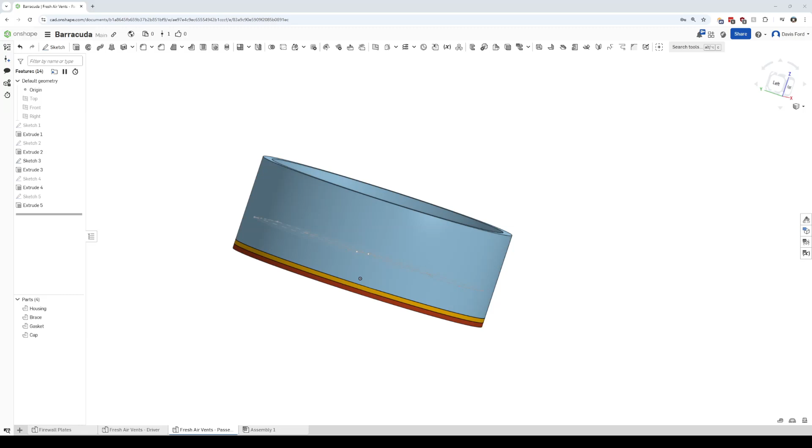This all started because my wife would complain about being really cold in my 1968 Plymouth Barracuda when I would take her on a drive, and rightfully so. There's this giant gaping hole that brings in fresh air from the cowl and deposits it in your passenger's lap. It's great in the summer, it's horrible in winter. On the driver's side, there's a box that controls this, but on the passenger side in an AC delete car, you don't have that luxury.

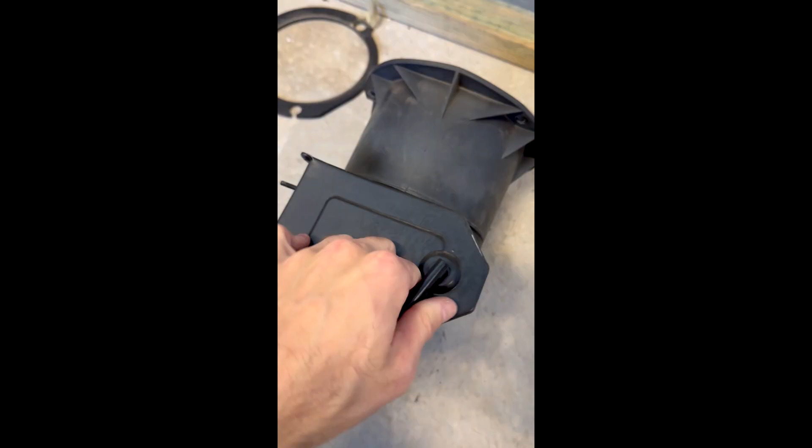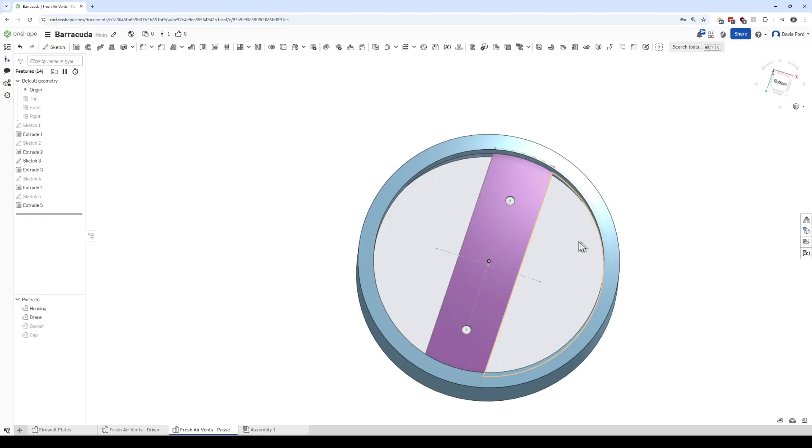So I whipped up a design in Onshape and sent it off to SendCutSend, who cut it out of stainless steel, tapped some threads, and sent it back to me. This is the fresh air vent in the Barracuda. You can't really tell from the bottom, but if you flip it over, you can see that there's a 4 millimeter deep lip inside that cylinder. So to take advantage of that lip, I designed this rectangular brace with rounded ends. It has two holes that we can thread bolts through in the future.

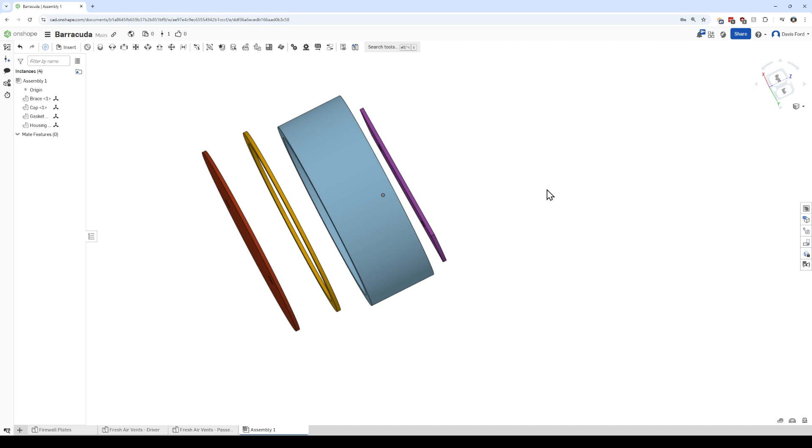So the way we're going to keep air out is by putting a cap on this thing. This cap is made out of 2 millimeter thick stainless steel. It's also got a couple holes in it, which, surprise, surprise, are going to line up with those holes on the brace. So here's how it all goes together. The yellow thing in the middle is a rubber cork gasket. It's pretty thin. It's just there to seal up any imperfections in the Barracuda's body metal.

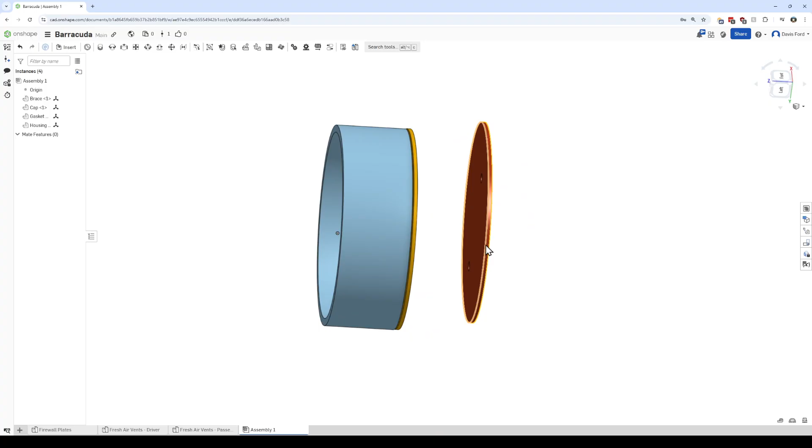But as you can see, we're just going to drop that brace down into the cylinder. It's going to rest on the lip. We're going to put the gasket and the cap up against it, thread the bolts through, which is tougher than it sounds. And once it's all together, you're done. There's no more air coming into your passenger's lap. Now I had to do this complicated brace and the bolt holes thing because there's no bolt holes or anything to attach onto on the passenger side. It's just a hole with nothing to lock onto.

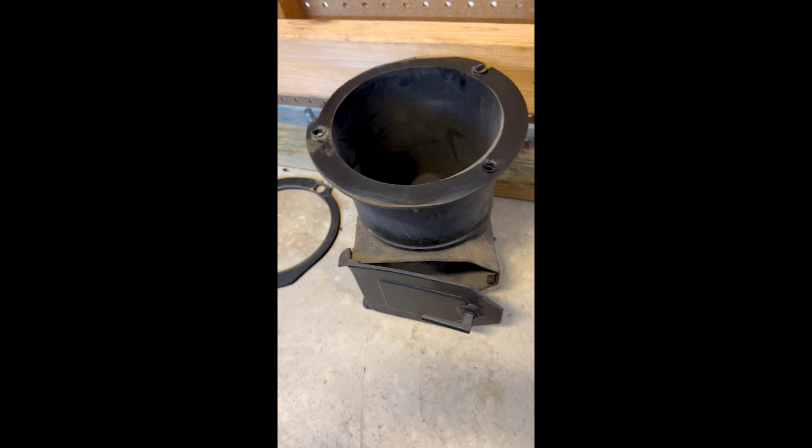On the driver's side, it's a lot easier. There's 3 bolts that are pre-installed in the body. All I need to do is take some measurements, make sure my holes line up, and it threads right on. Easy peasy. The finished product works. Installation wasn't that easy, but it did go in. I did make a couple revisions based on what I found, so future installations would be easier.

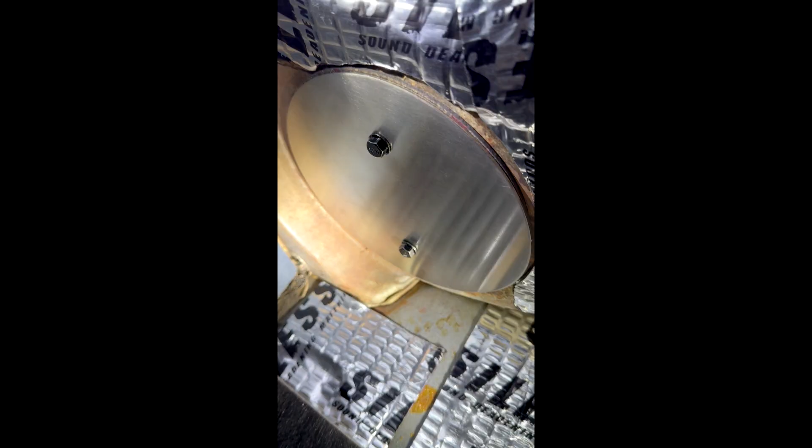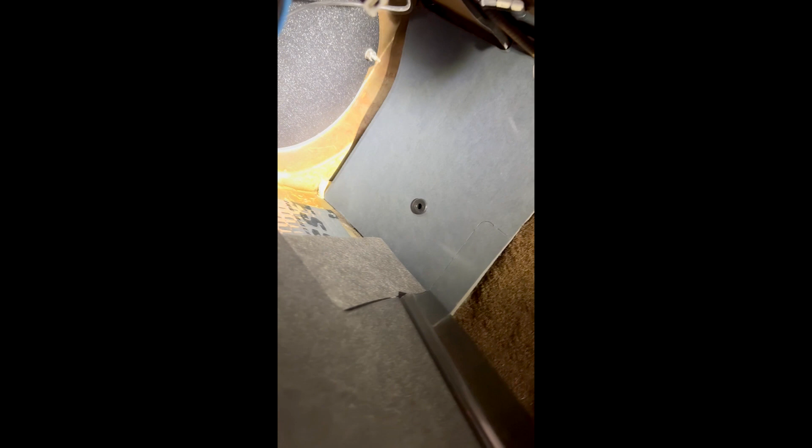The driver's side was way easier to accomplish. All I had to do was measure correctly. I just got this printed out of ABS plastic with a rubber cork gasket to sit in between the cap and the Barracuda. And the installation was extremely easy due to those pre-existing bolts. All I had to do was get this up there and thread the nuts on, and that's it. No more fresh air coming in through these vents. If you need fresh air in this car, just roll down a window.